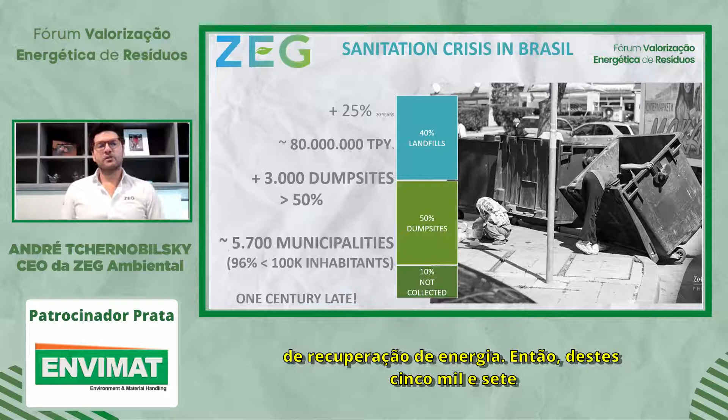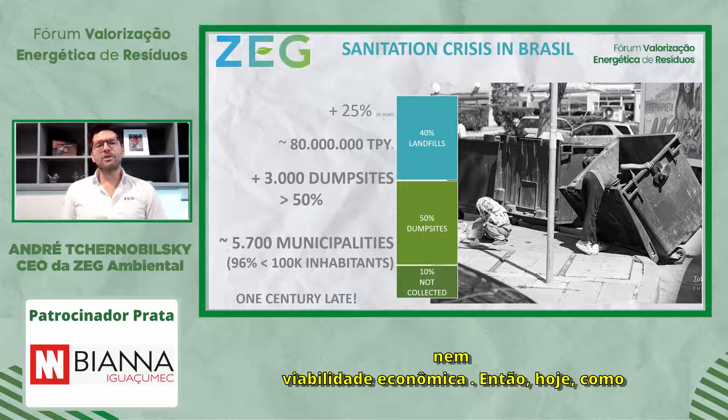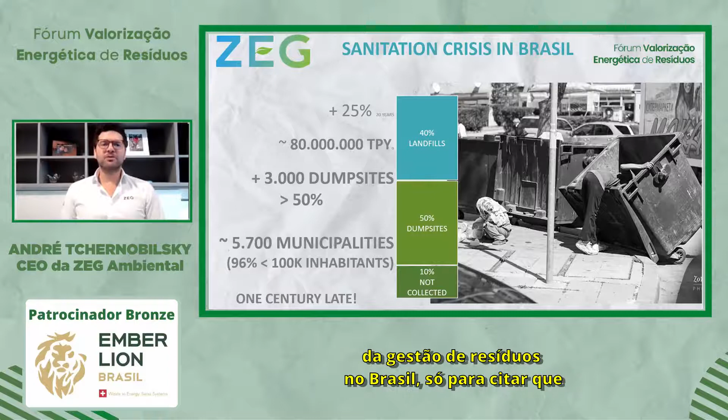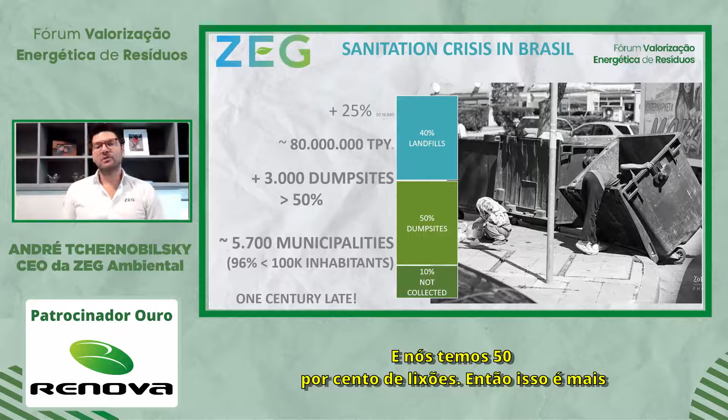From these 5,700 municipalities, 96% of all those municipalities have less than 100,000 inhabitants. That means that we cannot just bring technologies to Brazil from developed countries, because we will never get technical scalability, neither economical feasibility. So today, as we were 10 years ago, we are one century late in terms of waste management in Brazil. Just to mention that 10% of the waste in Brazil is not even collected, and we have 50% of dump sites. So this is more or less the figures that we have today, and it's actually the same as we had 10 years ago.

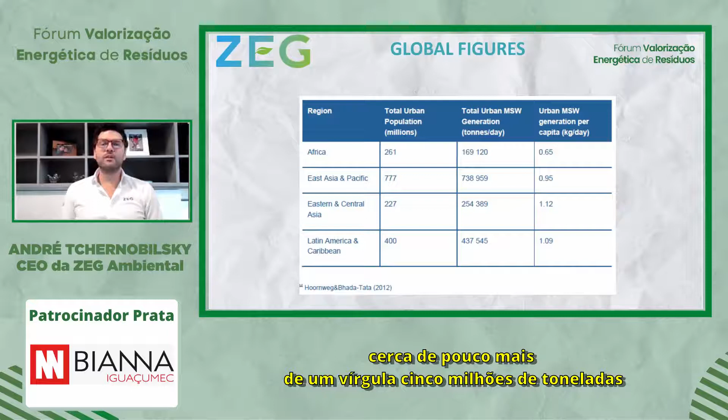What if we extrapolate this to the world? So I found this chart on the internet, which shows the waste generation per day, per ton by day, in each region of urbanized regions. So we are speaking that only the urbanized regions in the world, we are generating roughly around a bit more than 1.5 million tons of waste per day.

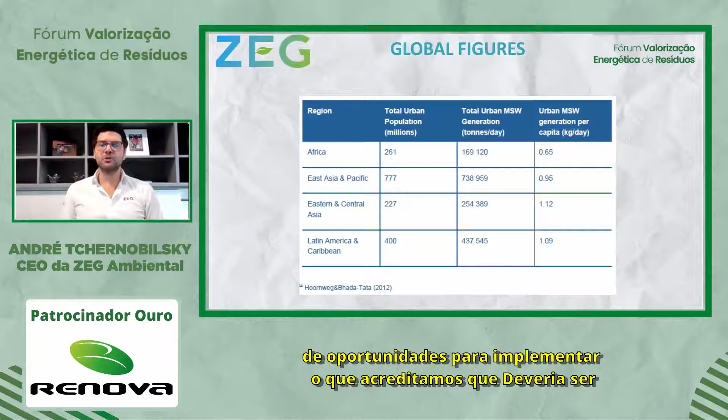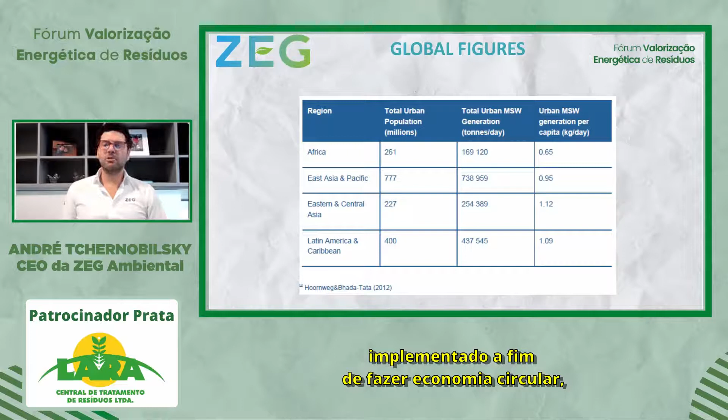What is the percentage of those cities that have less than 100,000 inhabitants or 3,000 inhabitants? So we will have a lot of opportunities to implement what we believe should be implemented in order to make circular economy, sustainable projects, and so on and so forth.

So what ZEG believes should be the engine of this circular economy and sustainable projects - we developed, since 8 years ago, a reactor. It's a pyrogasification reactor. We call it flash box. And as you will see, this flash box is very flexible. It's plug and play. In 10 days after you drop the container, it's a standard 40 feet container. Once you drop it on the floor, 10 days after you plug everything, you are able to start converting waste into fuel, renewable fuel gas, synthetic gas.

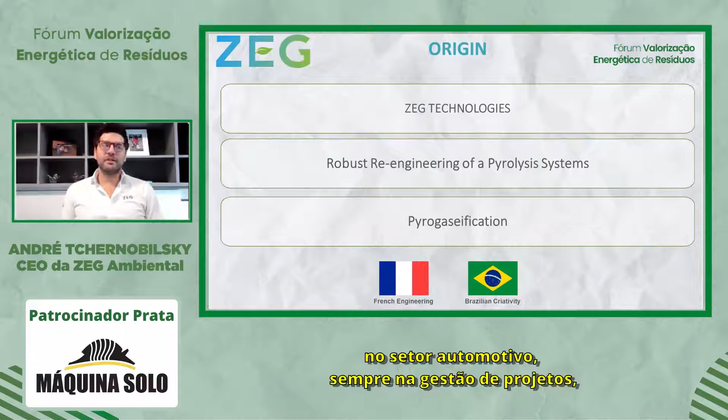So this technology was implemented and created with a French scientist and myself. This French scientist was the head of engineering of the French aerospace agency, and I am coming from the automotive sector. I spent 20 years in the automotive sector, always in project management, innovation, engineering. And my last 6 years were based in Luxembourg, where Delphi, the company that I was working for, has a technical center, and where we were creating innovation for the thermal division there.

So what is a FlashBox? FlashBox is not incineration. We do not burn the residues. We do not let the residues get in touch with the flames. We create a reductive atmosphere, sealed, so we do not have air or excess of oxygen.

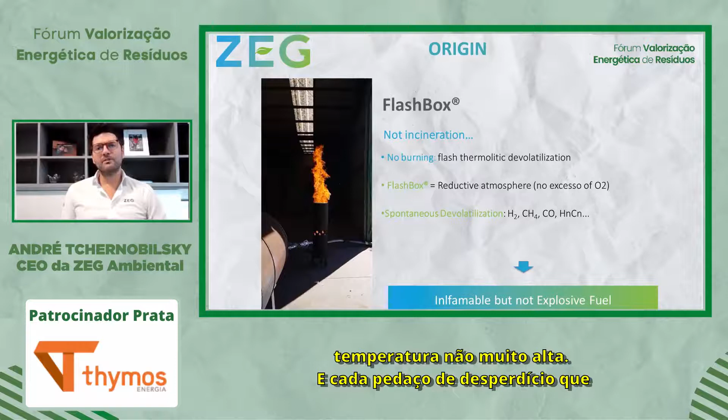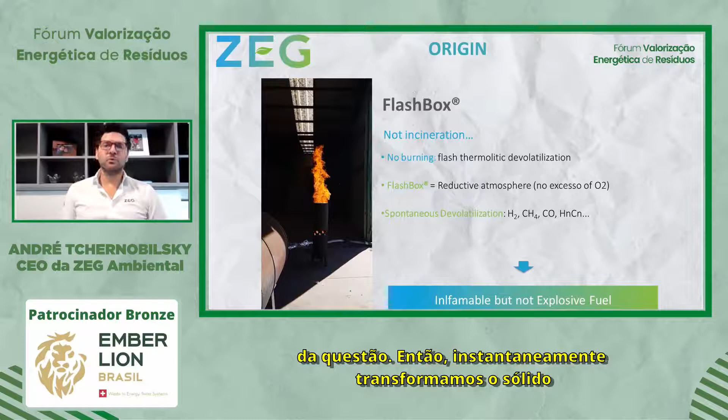And we take this sealed chamber, heated in a very high temperature, and every piece of waste that touches this very hot surface has a kind of spontaneous devolatilization of the matter. So we instantly transform the solid waste into a gas fuel.

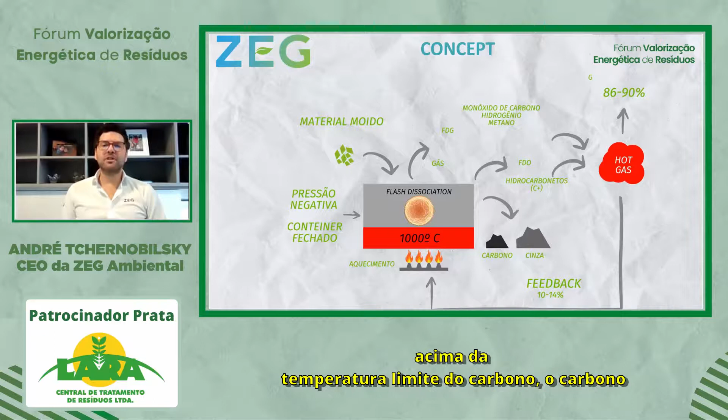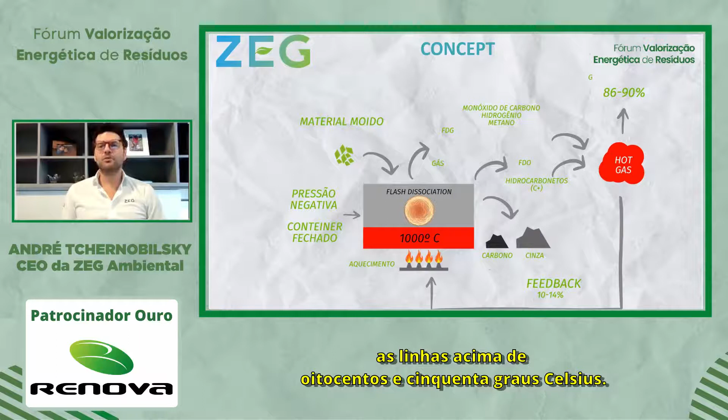So we keep the reactor above 1,000 Celsius degrees. This temperature allows us to reach above the carbon boundary limit temperature. The carbon not usually, but by chemistry, volatilizes above 850 Celsius degrees. So we always keep the temperature above 1,000 Celsius degrees, which is pretty much similar to a magma temperature from volcanoes.

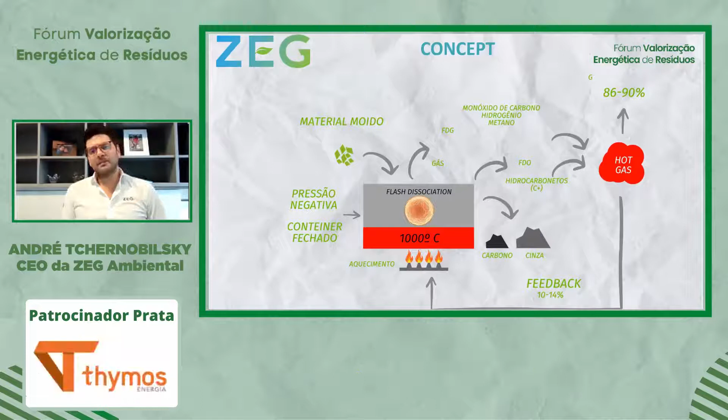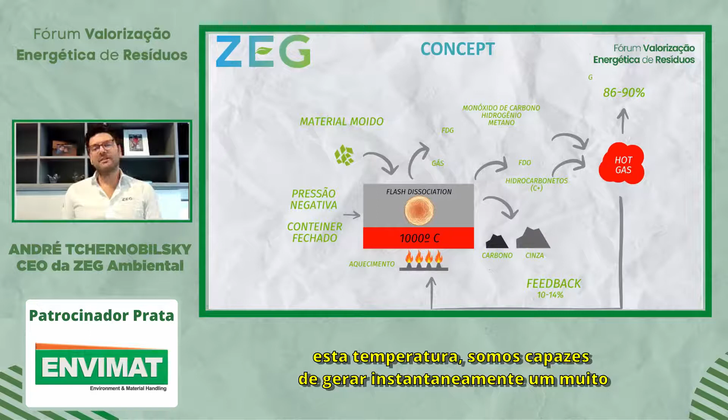And we make sure that with this temperature, we are able to generate instantly a very hot gas. And this hot gas is directly injected into an energy generation matrix.

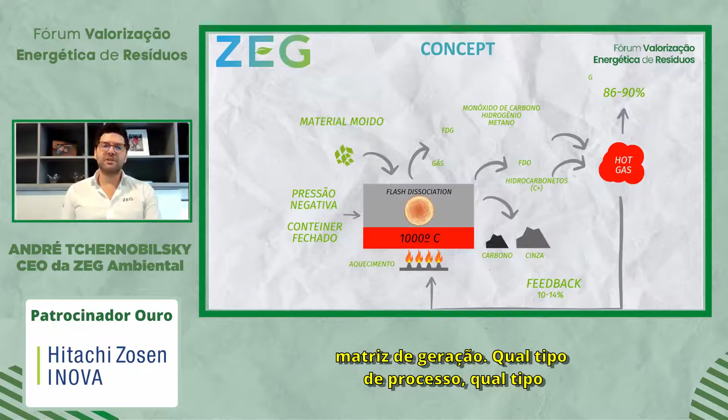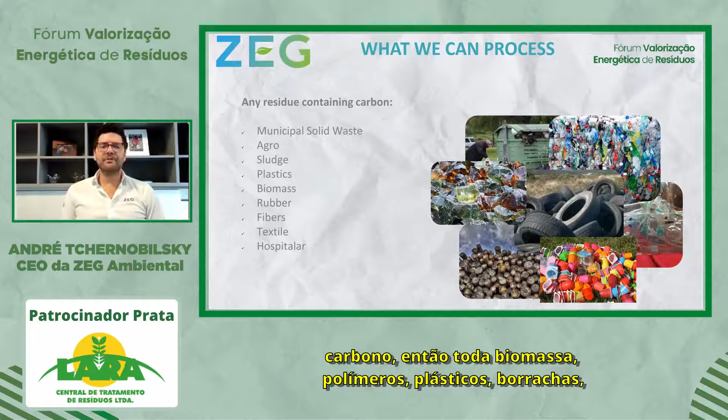Which kind of process, which kind of waste we can process? Every kind that has volatile carbon. So every biomass, polymers, plastics, rubbers, including hospital waste, dangerous waste, everything that can be volatilized.

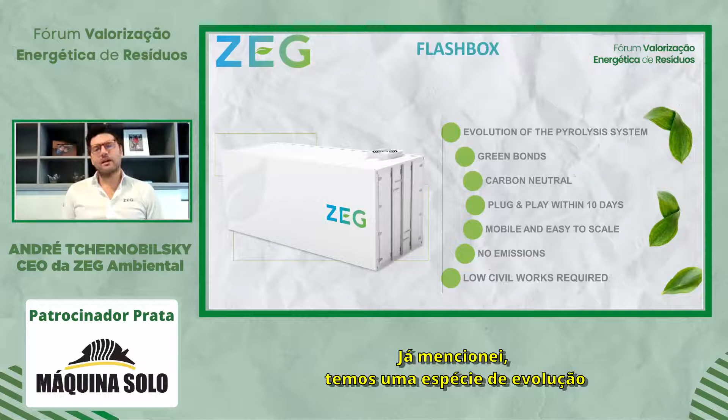So as I mentioned already, we have a kind of evolution of the pyrolysis system. We will always have green bonds and carbon neutral projects. We will always be able to collect carbon credits.

We are a plug and play solution. It can be mobile. You can put it on a truck, and you can transfer this container around certain landfills or dump sites or whatever. We do not generate any kind of dioxins, furans, toxic gases, because we do not have oxygen inside our container. We block the entrance of the air.

And a good thing for these projects is that very low civil work is required in each project. So the CapEx is relatively low.

So our business model, if we want to implement circular economy, if we want to support the UN social development goals, sustainable development goals that the UN is promoting in every country on the globe, we believe that we should implement our business model, which is the Eco Park 4D.

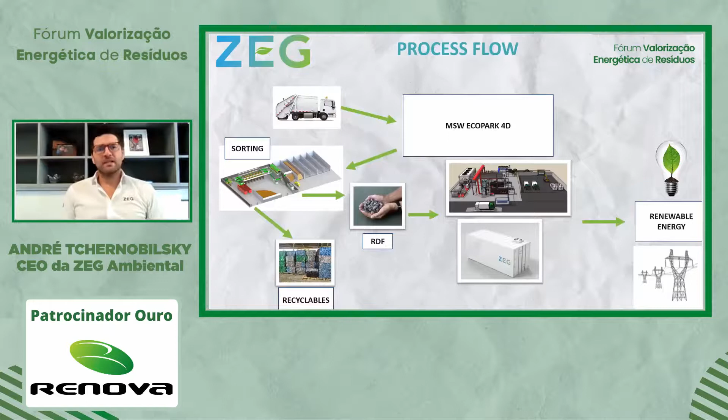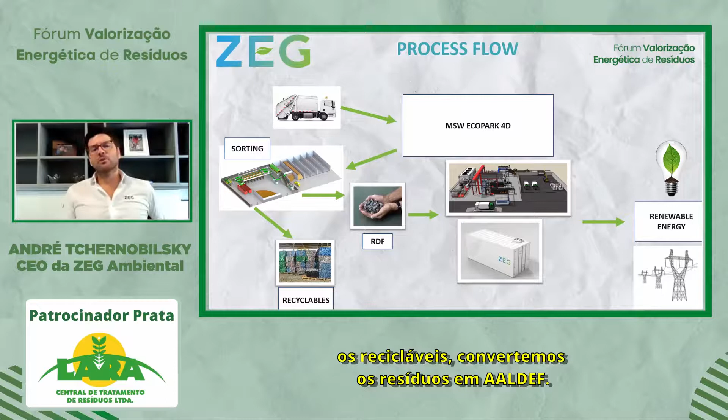So our process flow is very simple. We receive the waste at our eco park, we sort it, we recycle it, we sell the recyclables, we convert the waste into RDF.

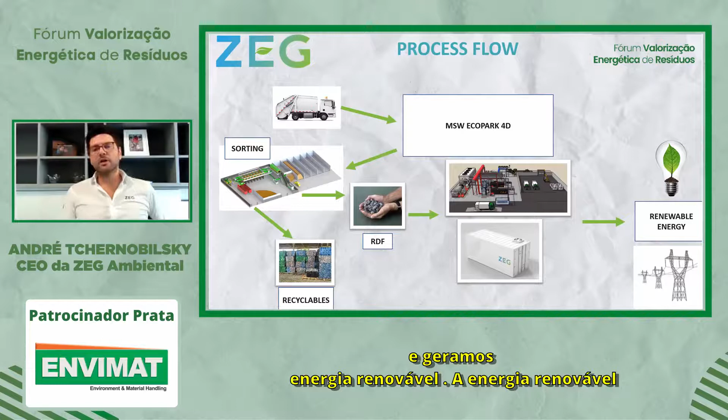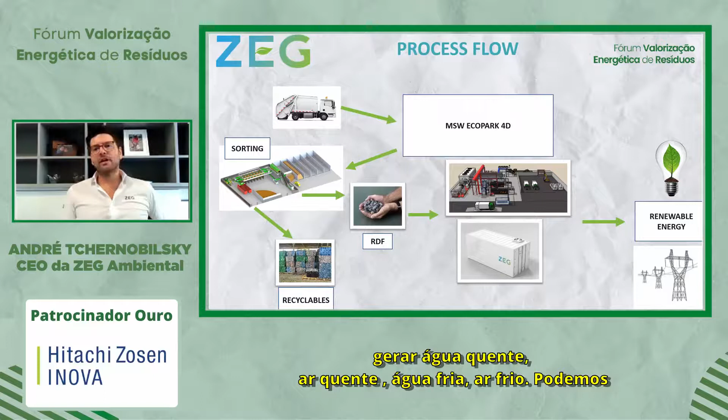The RDF goes to our waste to energy plant, and we generate renewable energy. The renewable energy means not only power, but thermal energy as well. We can generate hot water, hot air, cold water, cold air. We can make a solution as per our customer requirement.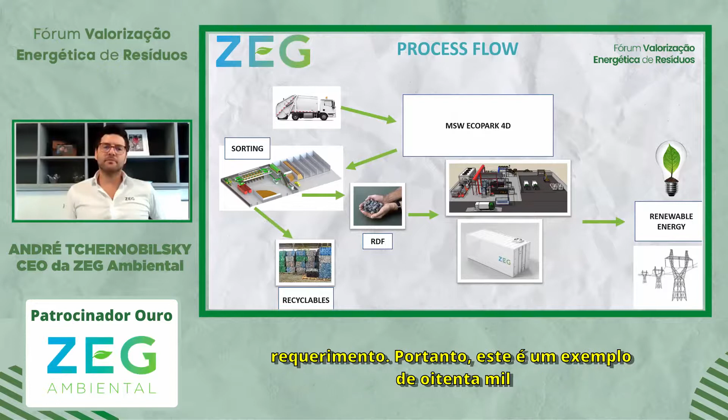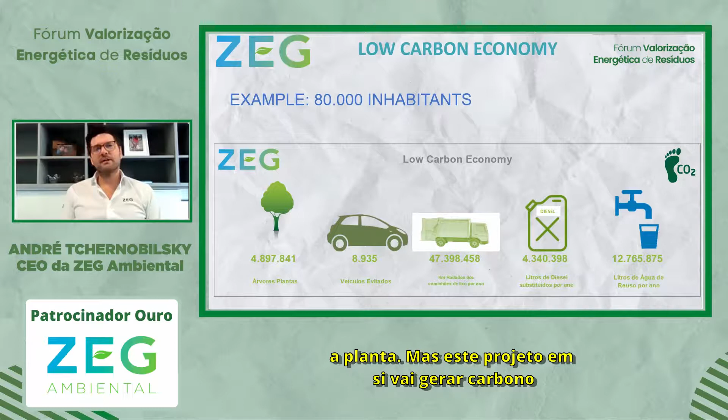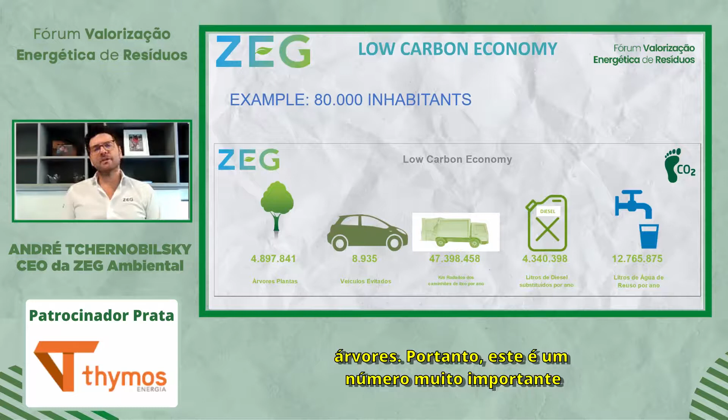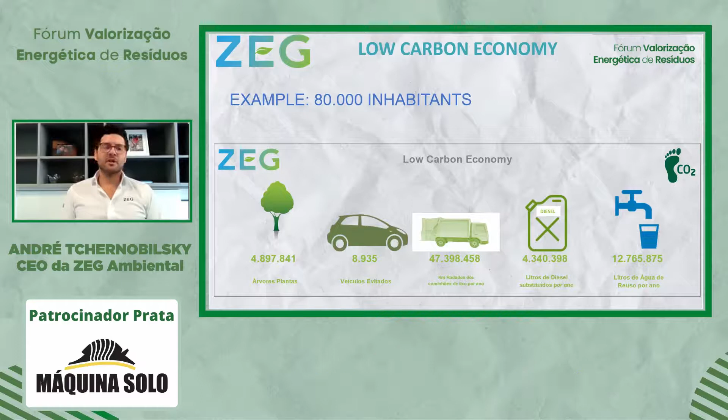So this is an example of 80,000 inhabitants. This is a project that we just kicked off. They are already starting with the civil works to get the plant. But this project itself will generate in carbon credits the equivalent of planting almost 5 million trees. So this is a very important number, because as the carbon credit market is increasing, we will always have some alternative revenue, and this is for sure going to support the economical results and the internal results and returns to the investors.

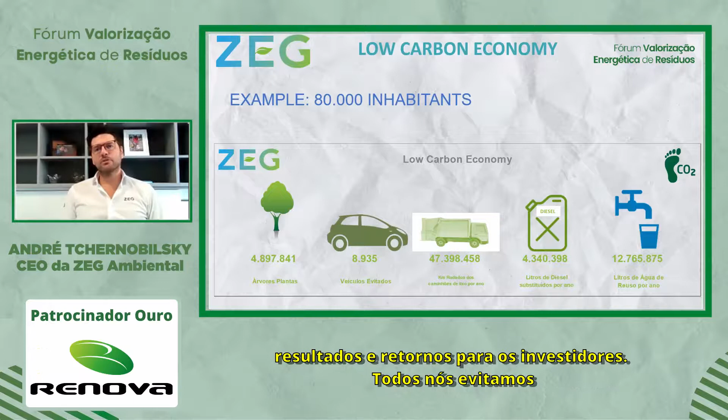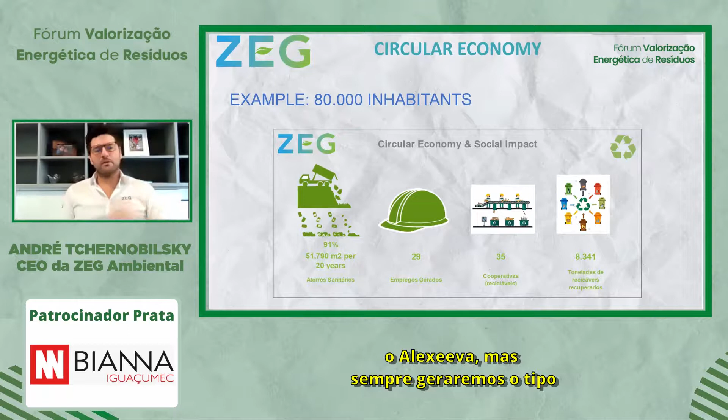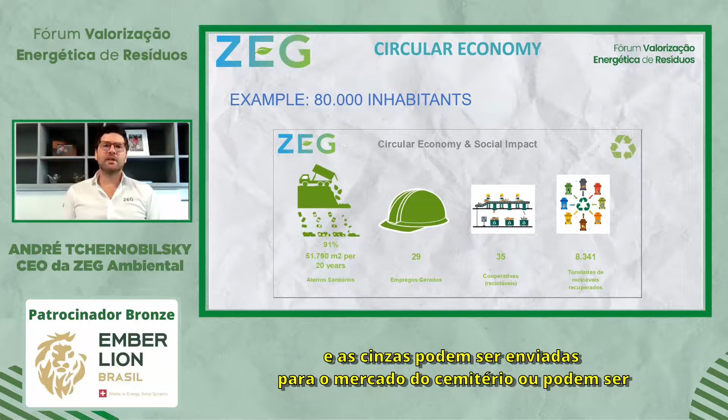We will avoid landfilling more than 90% of the waste. We will always generate a bit of ashes, inert ashes, not lixiviate, but we will always generate a kind of ashes and inert material. And this inert material and ashes can be sent to the cement market or can be landfilled.

And in this plant as well, we will be recycling more than 8,000 tons per year of recyclable material.

Where is ZEG now? Today we have 8 projects under development in Brazil. One is already commissioned, one will be commissioned from September 2021. The first 2 projects are located in Minas Gerais, Brazil. We have just kicked off another eco park in São Paulo State, the 80,000 inhabitants eco park that I just mentioned, and we have other 5 under financial structuring. This financial structuring will be requiring from us around $60 million, roughly.

We are as well developing a sustainable city in Tuscany with a waste management company. We were invited to develop the engineering part and the implementation part, the O&M part of the waste, all the waste management and sanitation of this smart city, of this sustainable city.